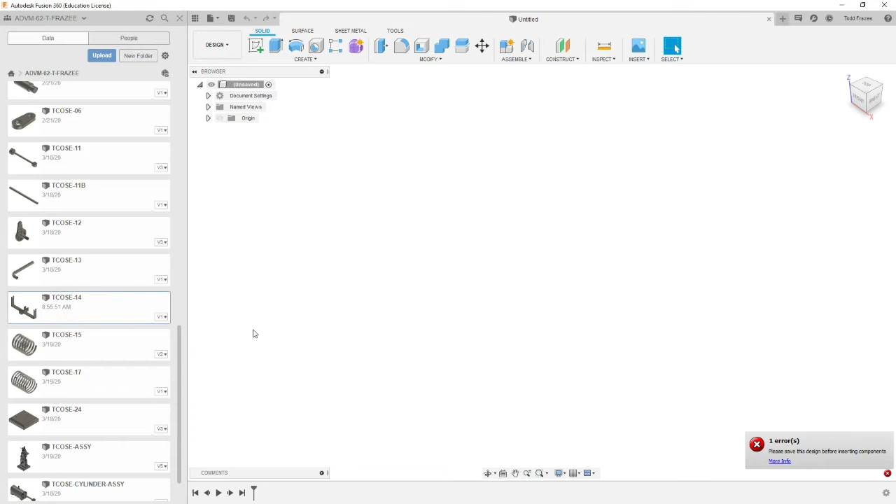So we're going to open our data panel, and we're going to double click on our TCOSE-14 part to open it. And it should be defaulting to your design workspace. And I'm going to close my data panel so I have more room.

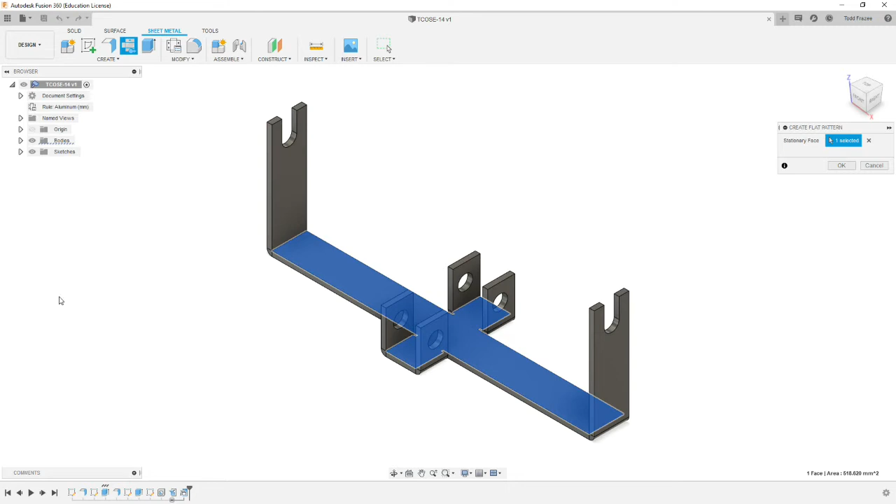And again, before we go into the manufacture space, we need to create a flat pattern of this part. So we're going to go to the sheet metal tab. And we're going to create a flat pattern, and we're going to pick our largest flat plane as our stationary face, and we'll select OK. Should create a flat pattern that looks like so.

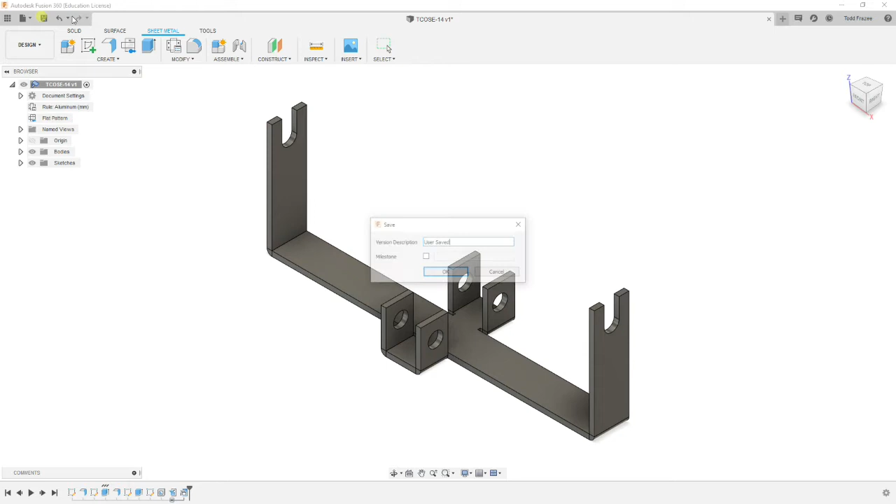You're going to exit your flat pattern mode. It will reappear over here, which you can toggle back and forth by selecting the round radio button to activate the flat pattern. And we're going to save. Make sure you save before you go between modes. Right now we're ready to go to the manufacture workspace. So we're going to go to Design, Manufacture.

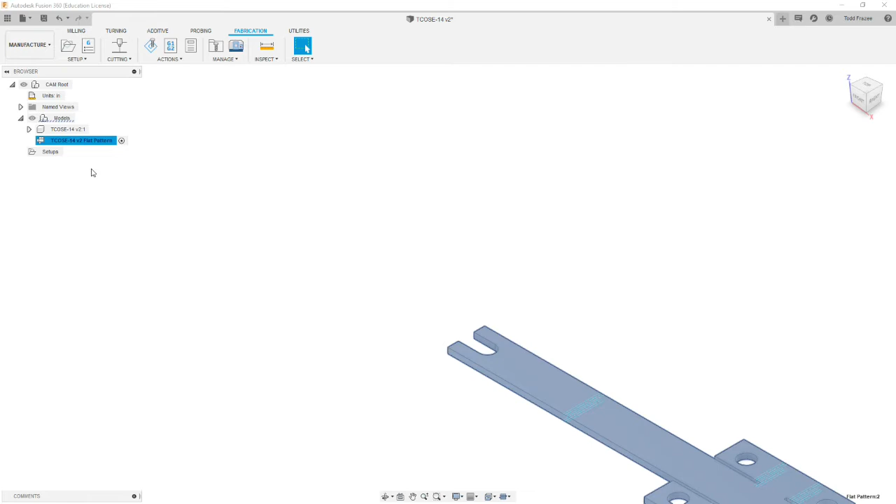And we're going to go to the Fabrication tab, which is where cutting is. The next step is you're going to expand the models, and you'll see the flat pattern under the model, and we're going to select the radio button next to activate flat pattern, and it'll flatten out the model. I'm going to readjust my screen so I can see the whole thing.

And now we're going to highlight setups. We need to create the setup where our toolpath is going to go. So we're going to do one operation to cut this entire part. We're going to setup, create new setup. It's going to throw a default stock boundary around it. We're going to select the stock tab.

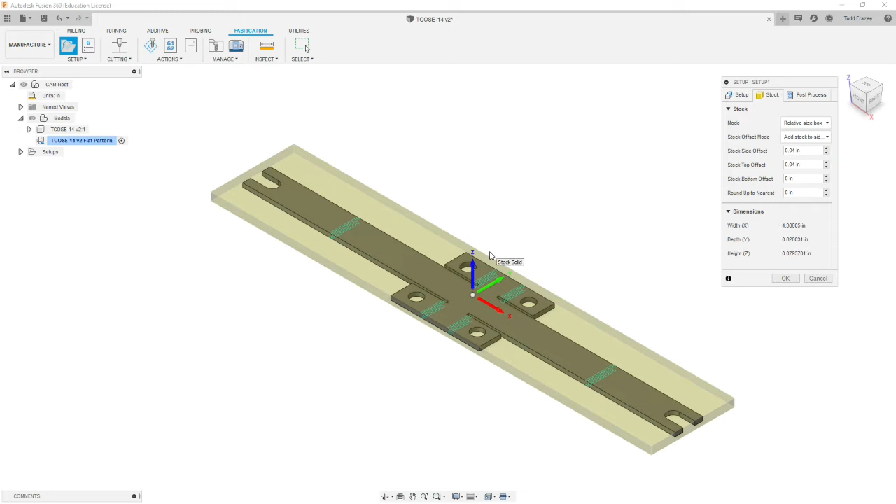And then on the side offset, let's do the same thing we did in the last one. We're going to put a 1/2 inch of extra material around the outside to clamp or whatnot. And our stock top offset is going to be 0 because we're going to be cutting a sheet that's already the thickness. All the other boxes on this worksheet here can stay at default. We can go back to setup.

Our box point by default is the model box point. I think we'll just leave it there for a waterjet part. We just got to cut our material, make sure that we set our origin centered on the machine. And we're going to go to the post process, and we're going to use the same naming convention we've been using for our program so far. This is the part 14, and we're going to put 01 for the first program.

And our program comment is going to be waterjet. Actually, waterjet is, I believe, one word. Operation. And that'll come up in our comments. And we're going to set our work coordinate system as 1. Okay, we're done with the setup tab. We're going to select OK.

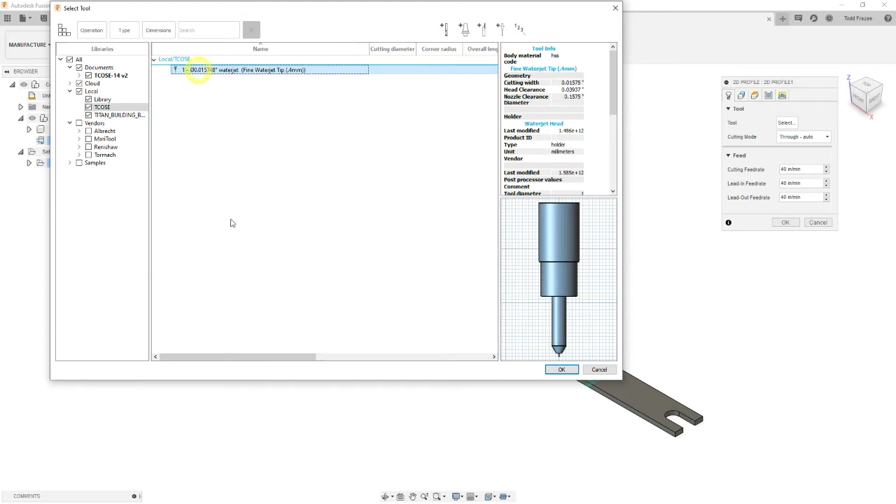Alright, so we're going to go to cutting, and we're going to select a tool we should have made in the prior tutorial. You're going to go to your TCOSE library, and we're going to pick the fine tip waterjet tip. We're going to hit OK. It should automatically plug in the default feeds and speeds, so we're going to leave those alone. We're going to go to the next tab, geometry.

What are we cutting with this operation? Well, we're going to cut these holes. So we'll select our holes. Alright. Now we're going to leave all these other boxes at default. We'll go to heights. We're going to leave all those at default.

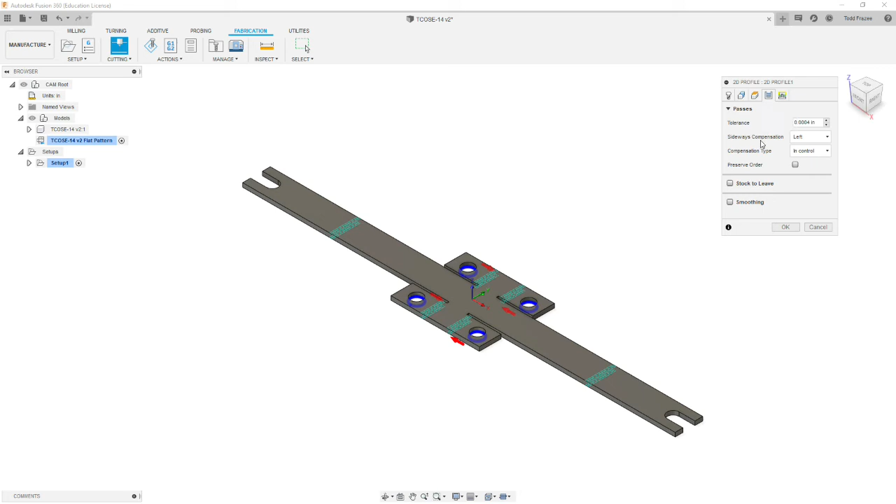We're going to go to passes. We're going to leave all these at default, except we're going to select smoothing. On a round feature, we want to make sure the smoothing is on. We'll go to linking, and we're going to need to make some changes here. We're going to set our lead-in sweep angle as 90 degrees, and that way it'll pierce, and it'll come into our hole at a 90-degree angle.

We're going to have a lead-in distance, and we're going to make that smaller because we're doing a really small hole. So we're going to make it 0.060, which is about half the diameter of the hole. And we're going to have lead-ins and lead-outs. And we're going to leave the pierce clearance alone. That's based off the diameter of the tool.

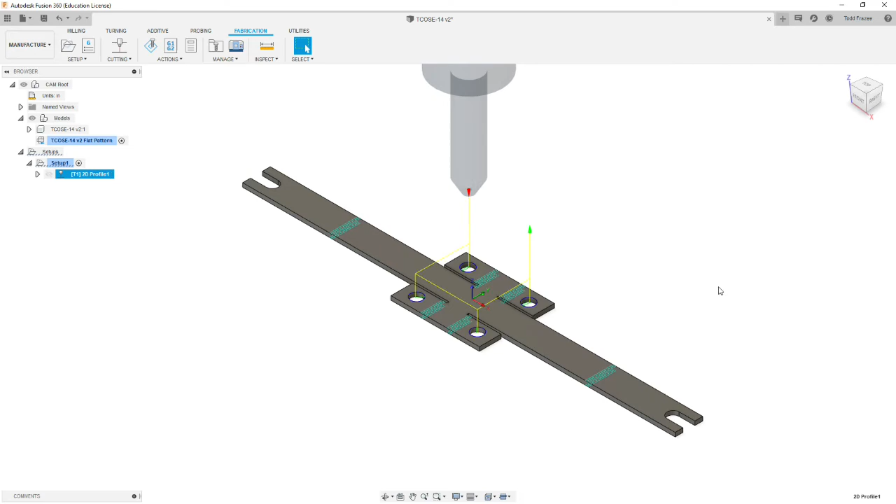And we don't need to select entry locations. We're going to select OK. And we should have toolpath that cuts each one of our holes. We'll want to double check that our lead-ins and our lead-outs are inside the hole, which it looks like it is. Okay, now we're going to cut the outside perimeter.

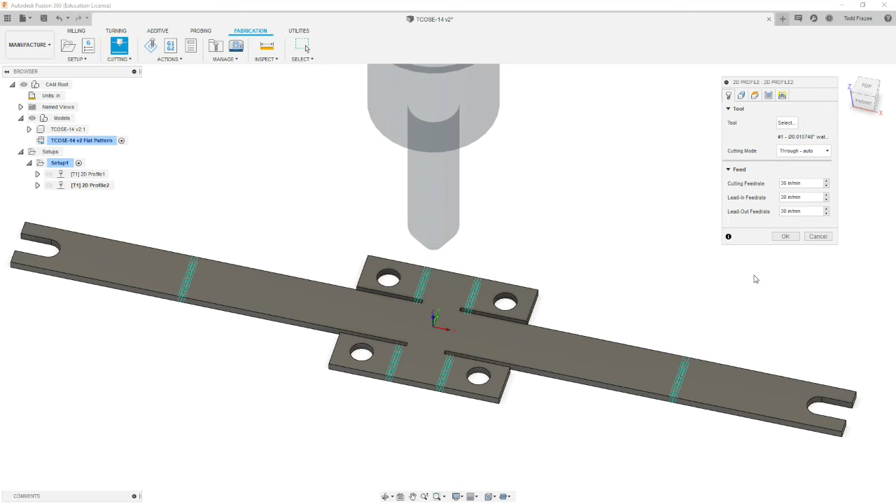And we're going to go to 2D profile. Everything on the first tab is at default. Geometry. We're going to select the outside perimeter of our part. Make sure the arrow looks like it's on the outside. And we're going to select this tabs feature. And we're going to make our tab width smaller than that.

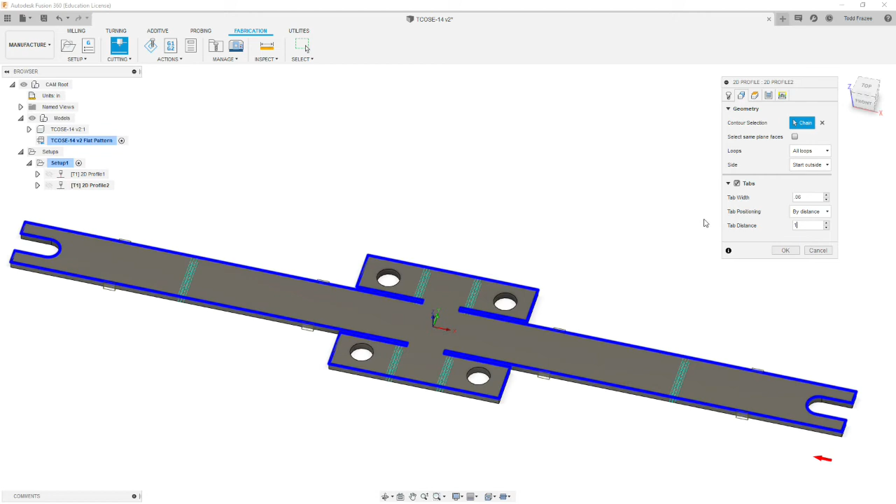Our material is 3 millimeters thick, so we want our tabs to be probably about half of that. And so that would be about 0.06. And we're going to put a tab every inch because this is a very small part. And it previews where our tabs are going to go. And that's actually pretty good because those are surfaces that will be easy to file. Hit OK. And we generate our toolpath.

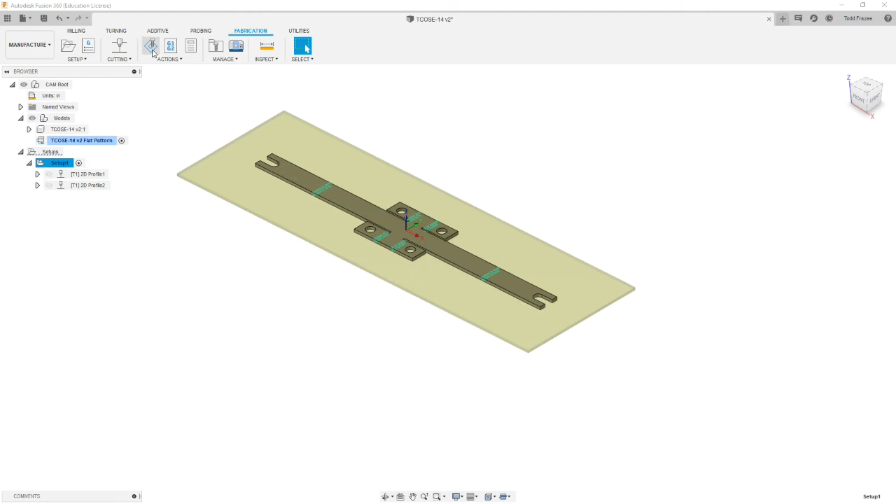Now let's go to simulate. Pick your setup so it simulates the entire setup. And we'll hit go. And make sure that your stock is shown. And hit play. We do our 4 holes. We come in and cut around our material.

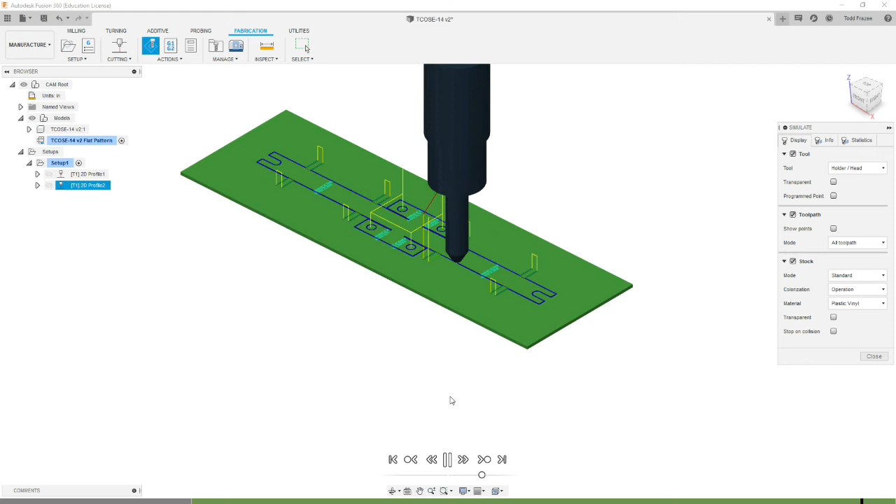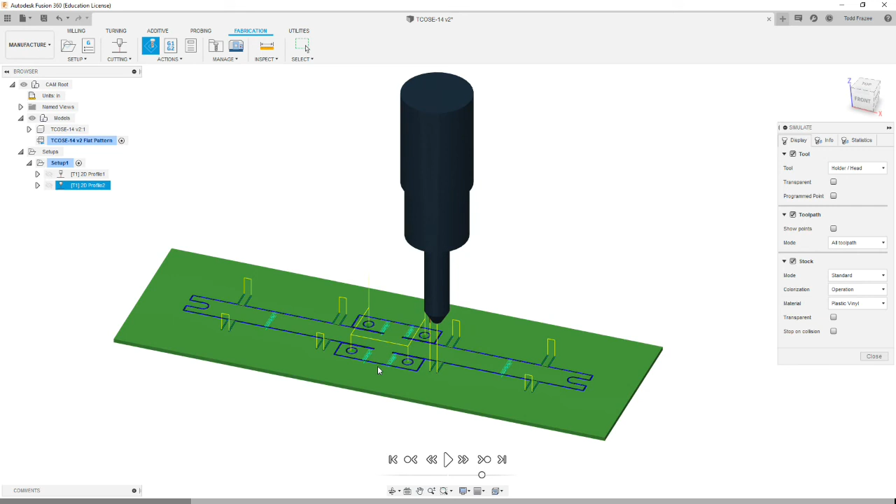And our tabs. And when we're done, we should have a pattern that looks something like so. And you should be able to see through it. And we cut our bend reliefs. And that should be everything for this part as far as programming. Now we're going to hit close on the simulation. We'll go back to home view.

And then we want to select the setup, so it displays the stock. I'm going to zoom out a little bit so you can see the entire stock. And it's centered because that's the view that's going to occur in your setup sheet. Make sure setup 1 is highlighted. You're going to go to the document icon here. It's a setup sheet. You're going to select your folder it's going to go in. So in my case, I put it on my desktop.

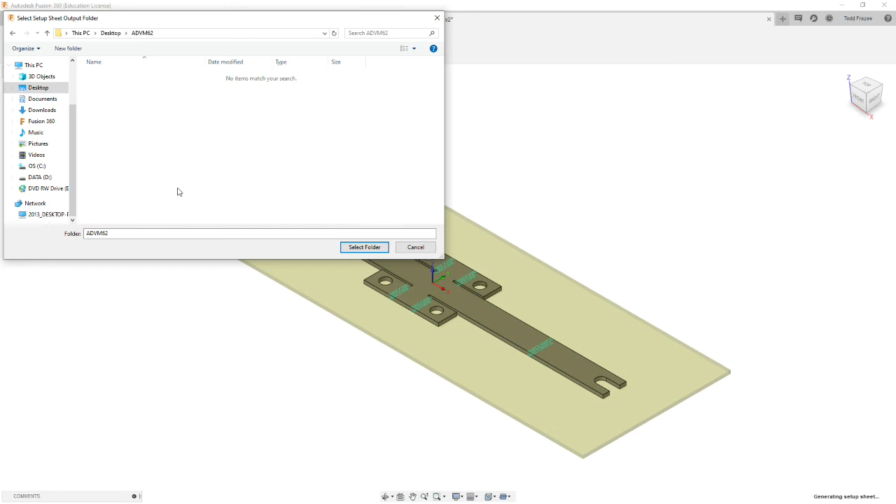Okay, select the folder. And it should pop up with an HTML version of a setup sheet showing the part, the origin, and your basic information on your 2 operations. Alright, so you can either save this as a PDF or an HTML. So I'm going to save as, in this case, HTML. And I'm going to save it in my advanced manufacturing folder and hit save. The alternative is to print it to PDF. Either one works. I prefer PDF if you can do it.

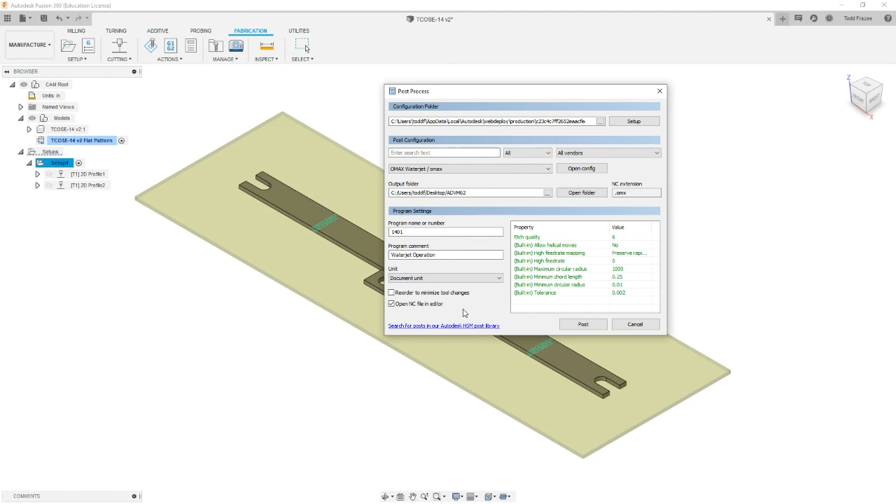Close the setup sheet. And then the next thing is to post-process. So you're going to post-process, make sure you have the OMAX waterjet selected. Make sure the Open NC file in editor is checked. You should have your program number that you set up in the beginning and waterjet operation as the comment. Hit post. It's going to go to a folder that you designate. So make sure you know where this is.

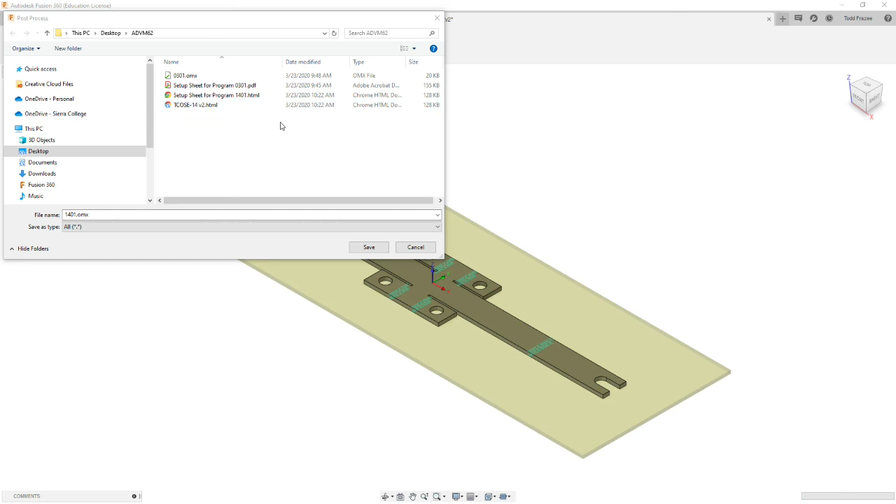And I'm going to save it in that same folder I made my setup sheet so that I'll have the 1401 OMAX file and the setup sheet for the 1401 HTML file in the same directory. Save. And if you had that checkbox set up, you should get a code file like this.

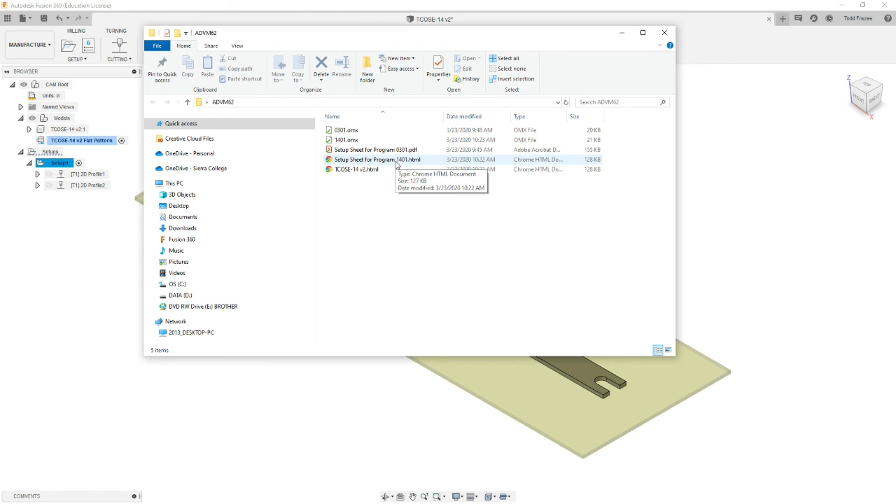And to submit your assignment and get credit, you're going to need to submit the 2 files you just generated. You're going to need to submit the program 1401 OMAX and the setup sheet for the 1401 program in either PDF or HTML format. And those are submitted in Canvas.

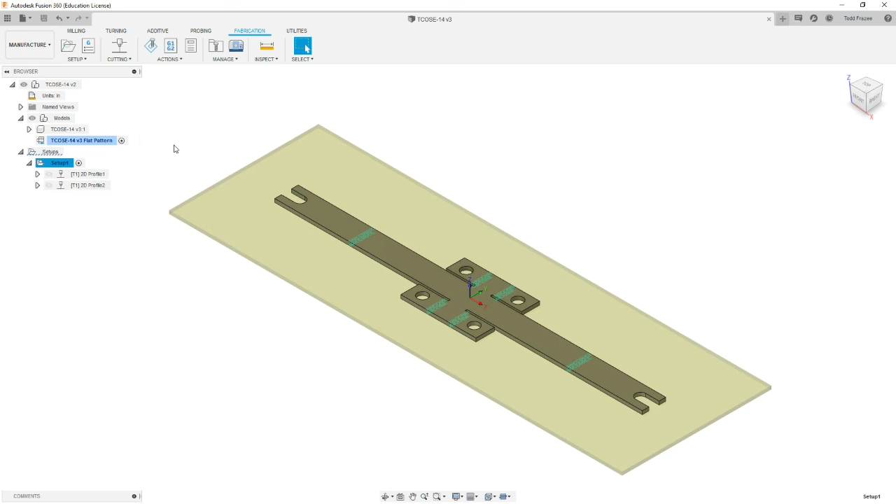And you're free to move back and forth between the different workspaces. So if you go back to design, there's your folded part again. And if you switch back to the manufacture workspace, there it is in the machine version. And you do not have to save off a separate Fusion file. It's all in one file with different workspaces.